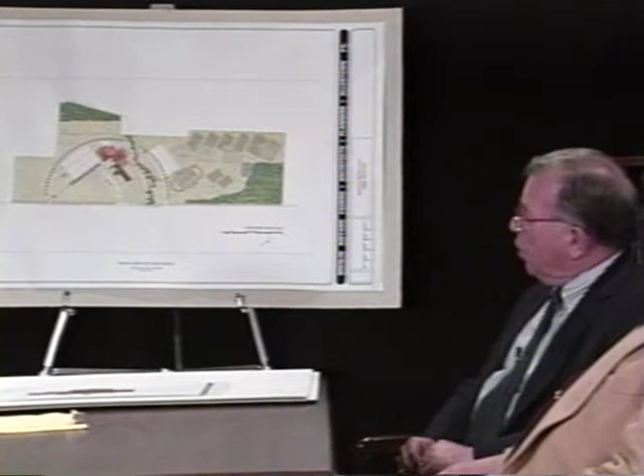It's a beginning point. This building will belong primarily to the school board and the community, and as a result, the board will make many final decisions. As we begin to look at our plot plan, we see that this is a concept whereby the building has been placed at probably the most advantageous placement possible on our 136 acres.

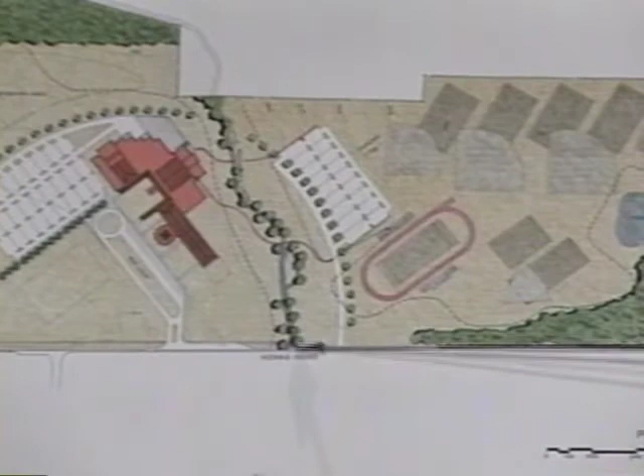I'd like to reference Kenas Road, which intersects with County Line in this direction and Horsham Road in this direction. Our property has the Little Neshaminy running through it, the creek that you see here. Initially we're showing the building, the bus loop, and the entrance to the building, and the major part of our parking is on one side of the creek, and on the other side of the creek we have a parking lot as well as all of our playing fields.

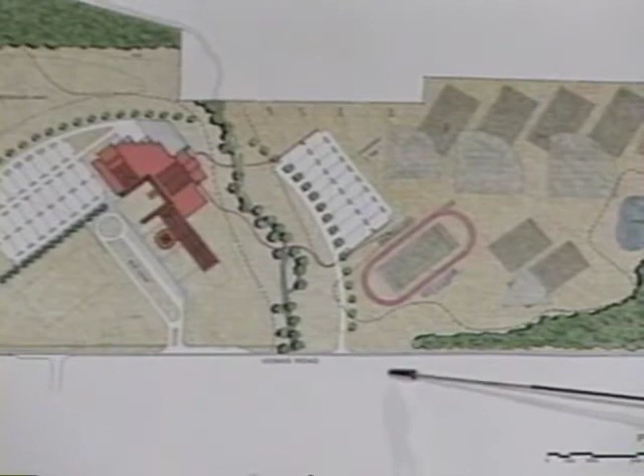It has been our understanding from the inception that although this will be an all-weather track and a playing field for both soccer and football, it will not be a stadium. Any games played within a stadium will be played at 1340 Valley Forge Road at the existing North Penn High School.

The walkways that you see crossing the creek are strictly pedestrian bridges. They are not bridges or cartways for vehicles.

One of the reasons the building has been placed where it has been placed on the property is there's a natural fall of the land, with this being a higher area than the area down near the creek. The advantage is, and many of us know we have a rock condition in our school district, we want to move as little earth as we can as we begin to build this building.

So we're taking advantage of the fall of the land, and in the back of the building we will have our cafeteria, our natatorium or swimming pool area, and our gymnasium, all accessible from what we refer to as ground level.

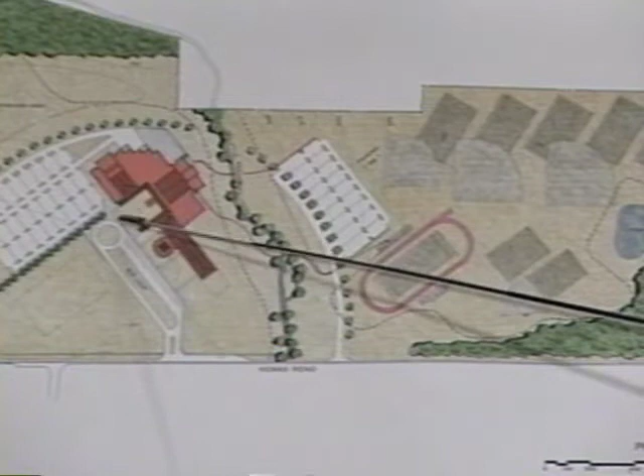At the first floor level, in the front of the building, this is our bus loop. We would park buses on the diagonal so we can accommodate approximately 35 buses. The library IMC is in the very front of the building. The auditorium is over on this side of the building, and the main entrance and main office area is over here, but there is a main entrance that comes in and you enter the classroom wing here.

I think it's important, when we talk about a 1,200 student building with a 1,600 student capacity, to point out that the outline you see at the end of the classroom wing would allow for expansion in the future, taking us from a 1,200 student building to a 1,600 student building.

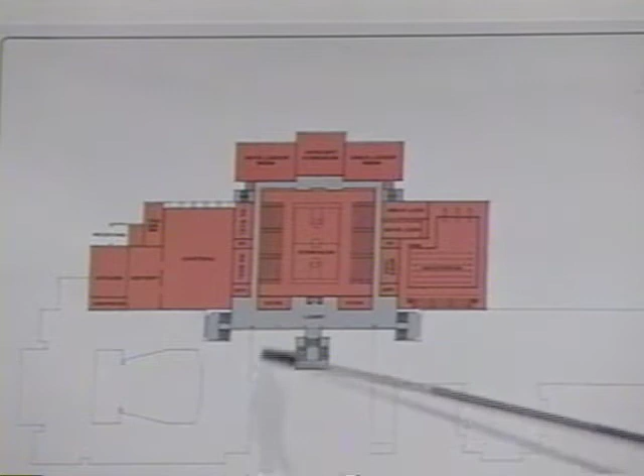The theory being that if we would expand the building to 1,600 students, we would be able to have school assemblies in multiples of 2, which would accommodate the entire student body.

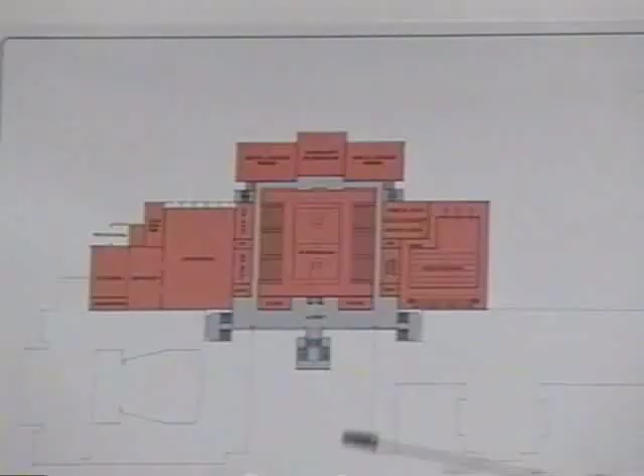Corridor sizes - this is very important. Those of us that understand our existing high school know that the reason we can accommodate 2,700 youngsters in our existing building is that many boards before this board had enough foresight to build corridors that are wide enough and sized for good movement of students throughout the building.

That is part of the core design. You would build a building, for example, that would have adequate lockers for 1,600 students. Your cafeteria, which will seat 550 students, would allow you to feed a 3-lunch program that would comfortably feed 1,600 students. So that gives you some idea about core facilities.

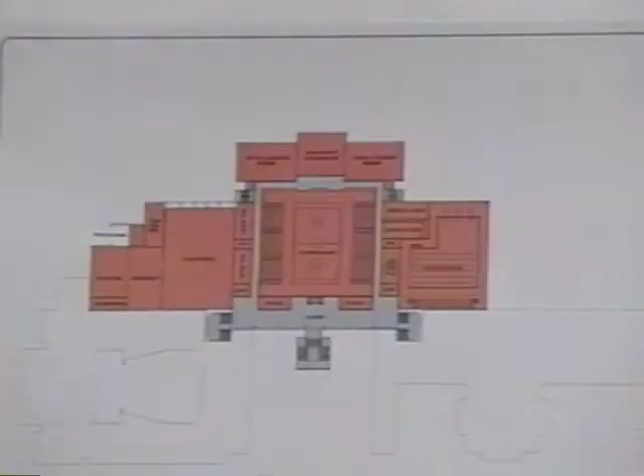Does the reference to core facilities also pertain to boiler capacity and heating and such things? Exactly. Your mechanical systems would be sized so that when you expand the building, there's no need to upgrade the electrical service, and no need to change boilers or chillers for heating and cooling. That's an important aspect.

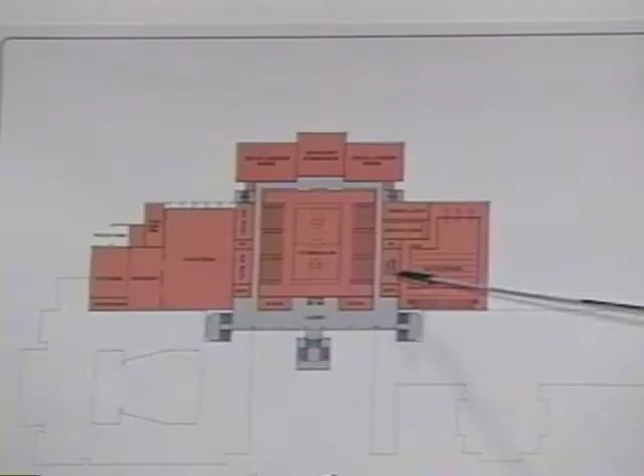You can see as you look at the pool area or the natatorium that we show a diving well here, we show a racing tank in this location. This part of the building, and I was able to share that with you on the plot plan or site plan, allows for access coming from that small parking lot on the other side of the creek into the back of the building.

When we move to the first floor plan, you will see the same main entrance here and a lobby area that will look down into our gymnasium area. Over here is our auditorium.

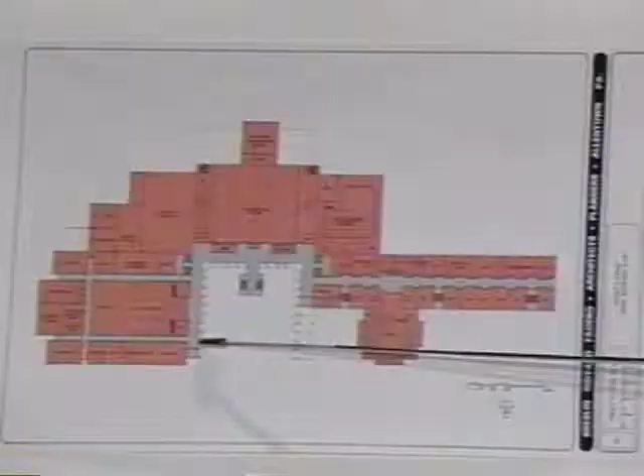You can see a traffic pattern, corridors being developed or designed so that they're pretty much in a square mode, and you have good movement throughout the building. Administration area is here, technical education. Back in this area, of course, our choral room, our band room, and our drama area behind the stage, which is a natural setting, good access from the outside if you have outside groups coming in.

Our library is separated from our classroom wing so that we can open it on weekends and in the evening, and possibly in the summer, for use without having access to the entire building. It will have its own exterior entrances.

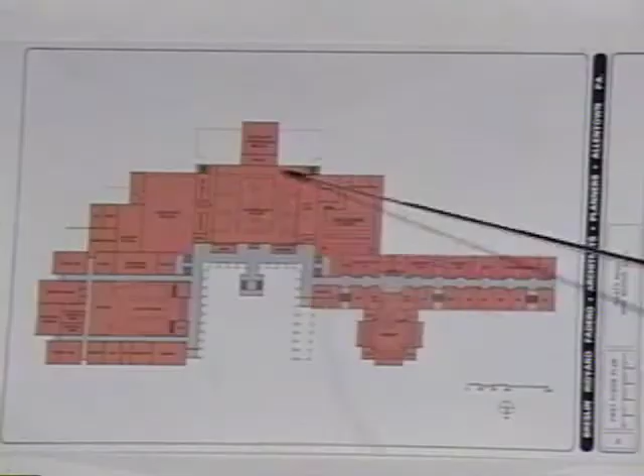So we see a rather good traffic flow. We have the administrative area here, but yet on each of the 3 floor plans you will see a grade level area located here. There's a normal mixture of science labs with standard classrooms.

Let's talk for a minute about the number of classrooms or instructional areas. We've heard criticism on one or two occasions about the number of classrooms designed for this building. Can you comment on that, especially the total number of classrooms or instructional areas?

When we do a schematic plan, and even when we get into the design phase which we're entering now with the architect, there is a formula and guidelines set forth by the Department of Education called a room schedule. It determines your capacity, your rated capacity, and your reimbursable capacity with the Department of Ed.

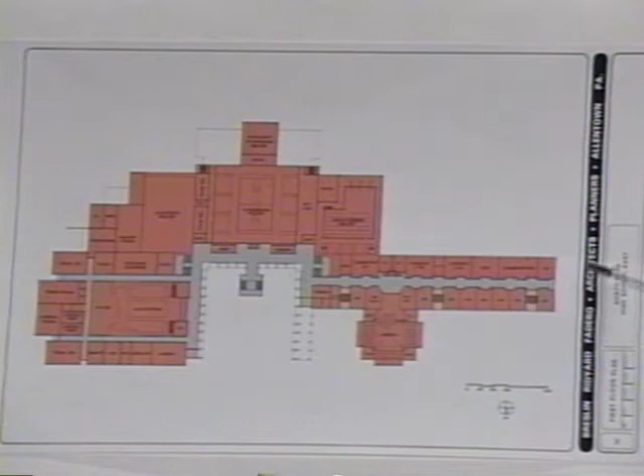We have 28 standard classrooms at 850 square feet each. But in reality, we have 64 instructional areas in the building, because a science lab becomes an instructional area, an art room is an instructional area, a computer lab, a business ed lab, a technology lab—all of those are instructional areas. So when you look at the overall room schedule, you see there are in fact 64 scheduled or instructional areas in the building.

We have also been criticized to some degree that this particular high school may not be of equal academic quality to what we're used to in North Penn. I want to point out that we will have a high school that is virtually equal, with the exception of a planetarium—all that we can offer in one school we'll be able to physically offer in the other. It should be noted that the Department of Education would not approve such a plan unless it had those capacities, and what is more, it's the Board of School Directors who determines the curriculum for both high schools.

As we leave the first floor plan and move to the second floor, I'd like to point out, as you look at the roof line on the building, that we're going to use a standing seam A roof. Many times we're criticized in public education for using a flat roof on our buildings. We're going to an A roof, and we're doing that for a number of reasons.

We know the longevity is greater than a flat roof, and water drains much better—we don't have standing water. But the other advantage, which I can show you, is in this area, the classroom wing, above the third floor with the A roof we will have a storage loft.

One of the things we always suffer through in the school business is where you store everything—band uniforms, drama sets, student records, archives, and the like. By extending our stairway and elevator to the additional floor above the third floor classroom wing, we will wind up with a storage area.

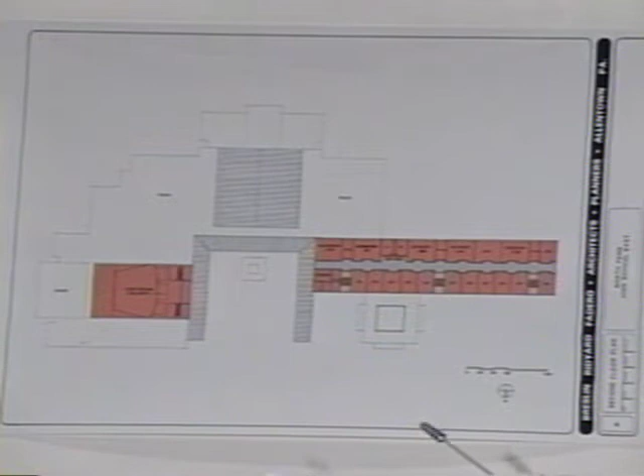The second floor classroom wing, as you see, is very similar to the first floor. You have your administrative or grade level office here. The second floor also shows the balcony to the auditorium, which would seat 800 youngsters. Once again, the expansion on this building would come off the end of this corridor, so really we'd be building three walls to do the classroom expansion.

The third floor layout, once again, you can see is pretty much a clone of the first and second floor as it relates to the instructional or classroom area of the building.

Our gymnasium, I failed to mention—I'd just like to say the gymnasium is 15,000 square feet. We do have an auxiliary gym, and that gym will seat 1,200 students. So we're comfortable with our capacities at this date.

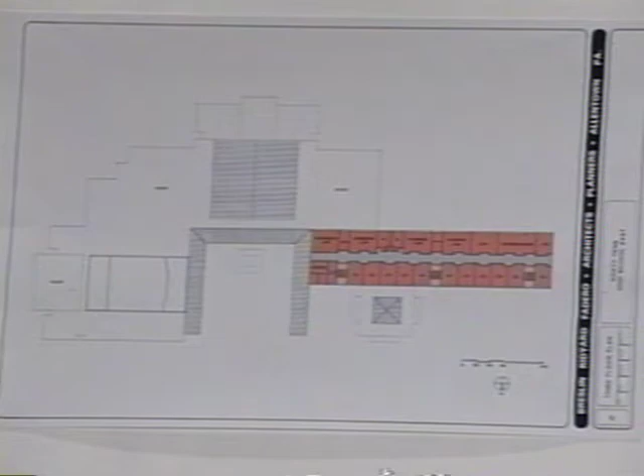And just to reiterate, this is a schematic drawing; we now go to a design drawing, and that is when we seek the input of our Board of School Directors and all of our staff members so that they can be totally involved in the design of the building.

We would want our science people, with all their specialized training, involved in designing the science labs, as we would want technology people, computer people, our librarian and media specialists designing the library, and of course our aquatic people involved in the pool design.

One of the things we take great pride in—and I guess it dates us a bit—Mr. Weir and I were both very instrumental in the design of the existing high school, and that was a teacher-designed building, a department-chairperson-designed building, whereby people had a lot of input into what we have in this facility. The role of these staff members in helping design the building wouldn't necessarily change the footprint at all—the footprint wouldn't be involved.

No, we're talking about equipping the building, the number of workstations, and the configuration at each workstation, and built-in cabinetry. As you look at homemaking, art, and science, so much of those areas are actually specified and built into the building. We would want labs that would service our teachers and students well, and the general flow, location, and way the building functions—the input of the staff that will be there, even existing staff members at our existing North Penn High School, becomes a very important part.

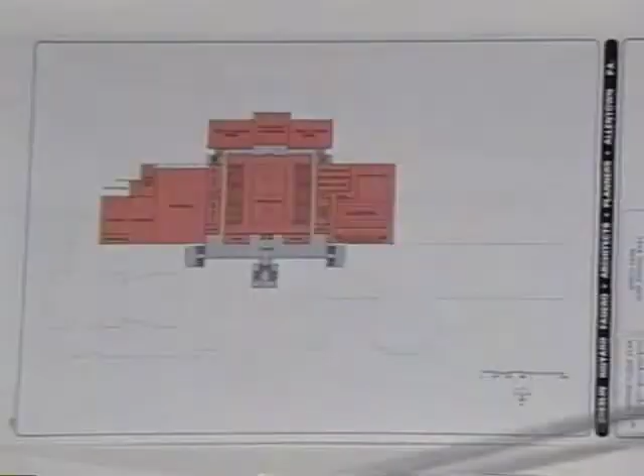That's part of the thought that went into it, actually. If you access the building from grade or ground level in the back, there's no need to be in any other part of the building. We can cordon off the cafeteria area and really isolate the building, but you can still come from our large parking area and go in the front, down the stairs into these two areas. So they really do become heavy community use areas as we perceive it.

Let's go back to the first schematic for the entire plot plan and look at the parking areas. If I can read correctly, the parking area to the left will accommodate some 540 cars, and we see the close proximity between the parking area and the auditorium and main entrance. I'm not sure I can read the number on the other side.

Is that 360 or 380? 360 on the right side for the parking lot. So we know we're certainly going to have adequate parking for major functions. We would expect that if you're coming in for a community ed activity, as a spectator, or if your youngster is involved in an athletic event here, you would park in this area and access our fields or go into the building. A major function in the auditorium would certainly use this parking area as we see it here.

Would we plan to have any tennis courts here? Yeah, we show an outline here, and we have to refine that yet.

For those familiar with the Hull Farm or the Kenas Road property, you can see down here the existing farmhouse and the existing barn. So if you're driving by, it gives you some idea as to where the building is sited on the property and where our entrances will be.

We're showing 3 entrances, and that is contingent upon township approval and PennDOT approval, because Kenas Road is a state road. So we will work through those approvals, but initially we're showing 3 areas of access to the property off of Kenas Road.

In our early conversations, there was consideration for the possibility of an elementary school at some future time, built on a portion of this site. Is that still possible? That's still possible. We show a 15-acre site right in here that we've set aside in case there ever would be future expansion.

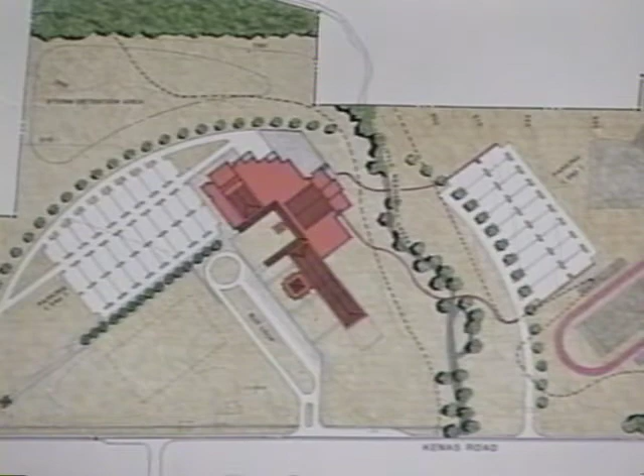Typically, when we do an elementary school, because of our parking requirements, we like to use minimally 25 to 30 acres. 25 acres is an ideal site. But the reason we need that type of acreage is because of the parking required.

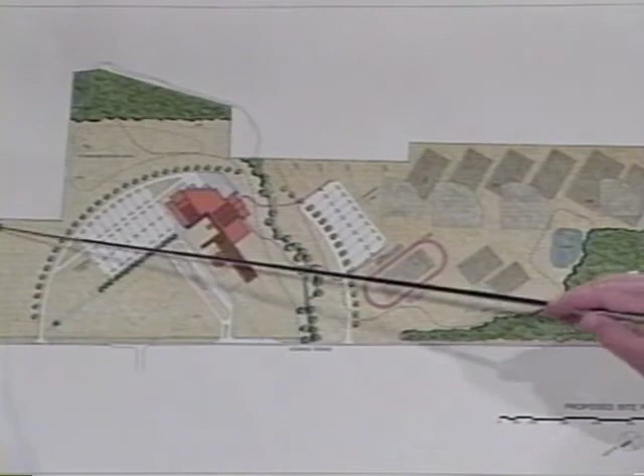Our thought would be in scheduling events, if we had a back-to-school night or some kind of musical or concert going on in an elementary building, and looking downstream to a time when there would be an elementary building here, our overflow parking would take place in the high school lot. So we would double the use of that lot for the elementary building.

I think we need to take a look at what lies ahead. What are the next steps here? This certainly isn't final design, but what is the timetable as we look ahead and move this project? Because there is an interest in moving forward and keeping this project on the front burner and not letting it get to the back burner.

What's next? Well, obviously, we need to think in terms of what requirements the Department of Education will place on us, and we need to stay on schedule with that. We need to make sure we satisfy the requirements of Montgomery Township so that we can proceed with the Planning Commission, with the township supervisors, with all types of requirements such as surveys, wetlands, environmental studies, archaeological study if necessary. And those are being done as we speak with and by Mr. Breslin and his concern.

We need to get with the Board of School Directors to make sure that we're on a financial pattern that's necessary. That is, if we need to borrow the money and when we need to borrow it. So the Board of School Directors has to meet and make those decisions.